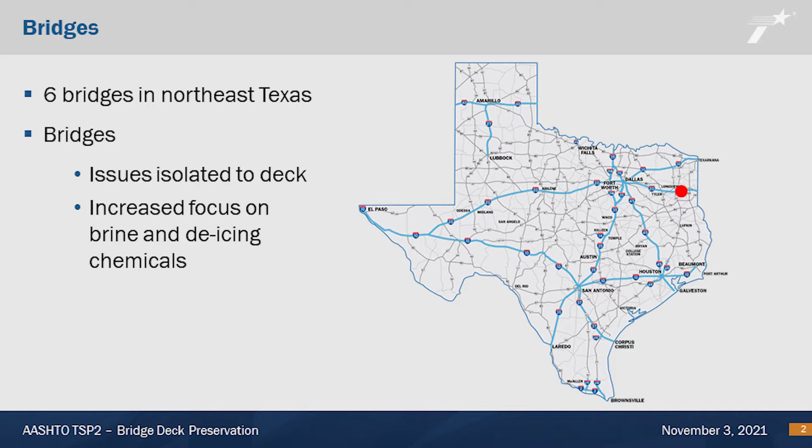I'll focus this discussion on one specific project, a project in the northeast part of Texas, where we had a series of 6 bridges with issues isolated to the deck. Substructure and superstructure were in good condition, and we were looking for a tool to add to our toolkit that would help us to provide a protection level to our bridge decks.

So with increased focus on brine and de-icing chemicals across the state, trying to find something that we could add to protect our bridge decks was important and is important as ever.

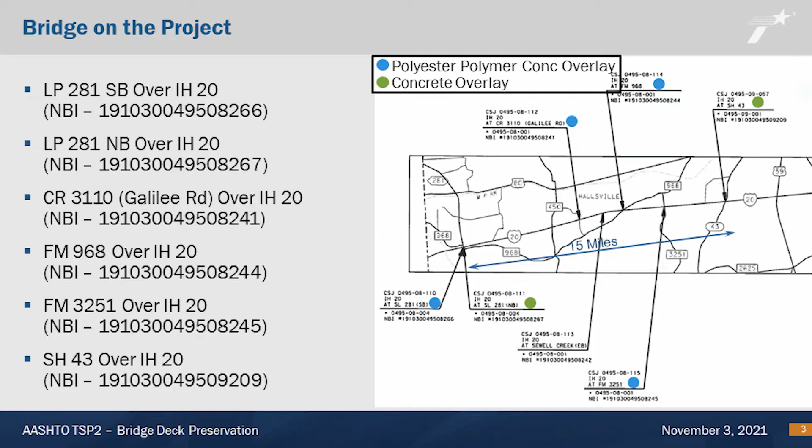These bridges that we focused our efforts on were a series of 6 bridges over a 15-mile stretch of I-20. All of these bridges cross over IH20, so we tried to take a measured approach to the risk, looking at, rather than focusing on the interstate bridges themselves, a series of bridges that went over the interstate. These were state loops, county roads, FMs, and a state highway, so we were looking as high as about 6,000 ADT, so not extremely high risk.

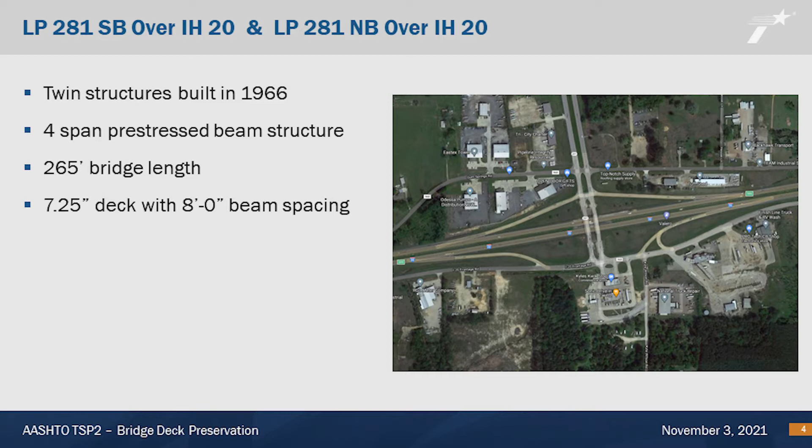All of the bridges on this project were constructed in 1965 or 1966, had 4 spans of pre-stressed beams superstructure, and had about 260-foot span lengths. This first set of bridges was a pair, Loop 281 southbound and Loop 281 northbound. Both had 7¼ inch bridge decks and 8-foot beam spacing.

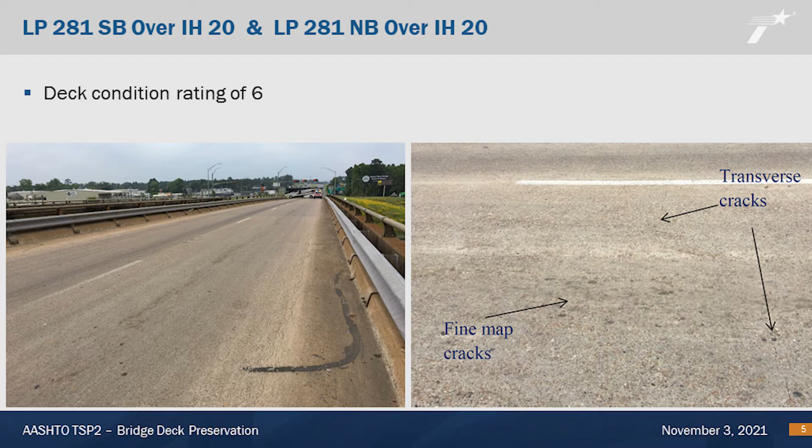The decks on these bridges had a condition rating of 6. The riding surface was worn down, the concrete was worn down. There were fine map cracks, some transverse cracks, a few spalls. The deck was polished, but again, the superstructure and the substructure were in good condition.

So on one of these, we applied the 3/4 inch polyester polymer concrete overlay, and right away, right after the installation, the condition rating of the deck was raised to a 7. On the adjacent bridge, the northbound bridge, we applied a 2-inch concrete overlay.

This has been our go-to for I'd say almost 50 years for providing protection to our bridge decks. Because of cracking, shrinkage cracking, the condition rating of the deck stayed at a 6. So even though we know we've got maybe a level of protection, it didn't show in our numbers.

So this is kind of related to a presentation or discussion that we had yesterday about quantifying the benefits of a preservation action. So in one, we had immediate benefit and quantifiable benefit if we're assigning a grade or a condition score to it based on a condition rating. So maybe we bumped up the equivalent bridge deck score if we wanted to grade it on an A to C or A to D scale.

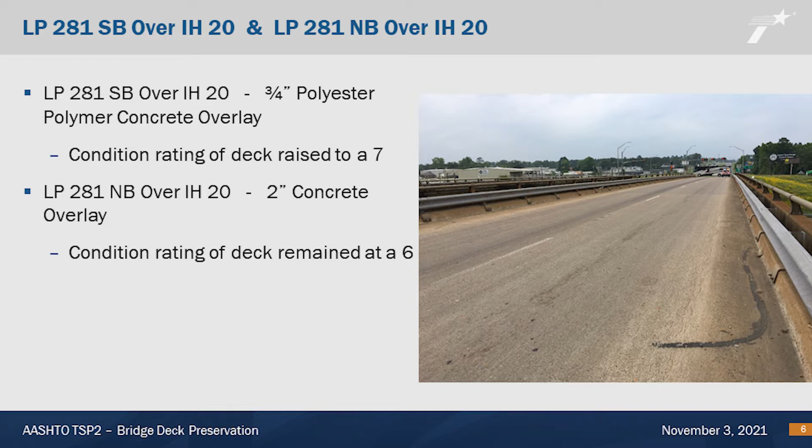Maybe we went from a C to a B, or a B to an A in this case. And so that's important, right? Making sure that we can quantify those benefits. In the case of the northbound bridge, staying at a 6 really means, well, maybe we prolong that condition rating of a 6 for a little longer, but it's hard to justify, it's hard to see from maybe administration's perspective, well, what's the benefit of doing this? So obviously, from that perspective, the PPC has a little bit of a benefit.

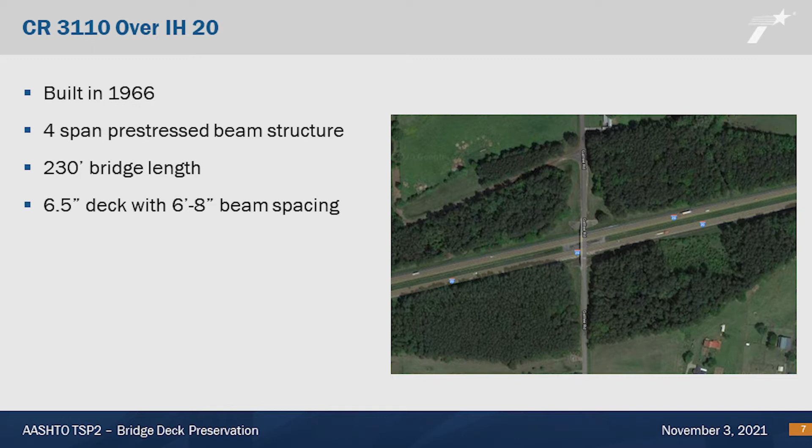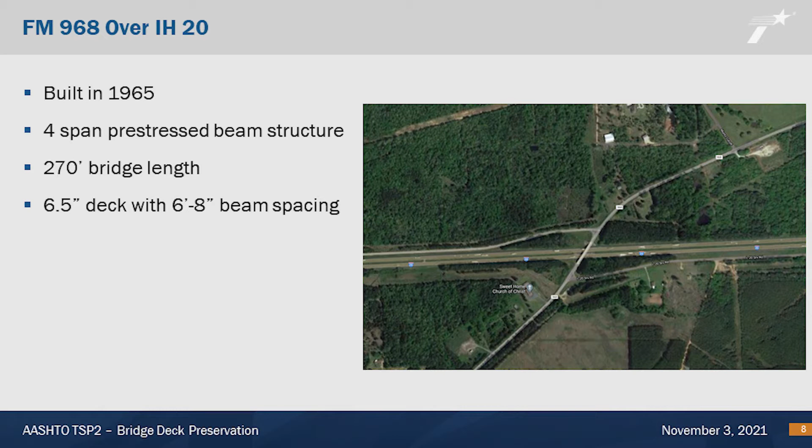The next bridge over was County Road 3110 over I-20. Similar to the last bridge in a lot of respects, this one had a 6.5-inch deck with 6-foot 8-inch beam spacing. It's got a 15-degree skew, so it has a little bit of issues at the joints that are a little bit of a challenge. The next one over, again very similar, but this one's got a 6.5-inch deck, 6-foot 8-inch beam spacing, and we're talking about a 35-degree skew there.

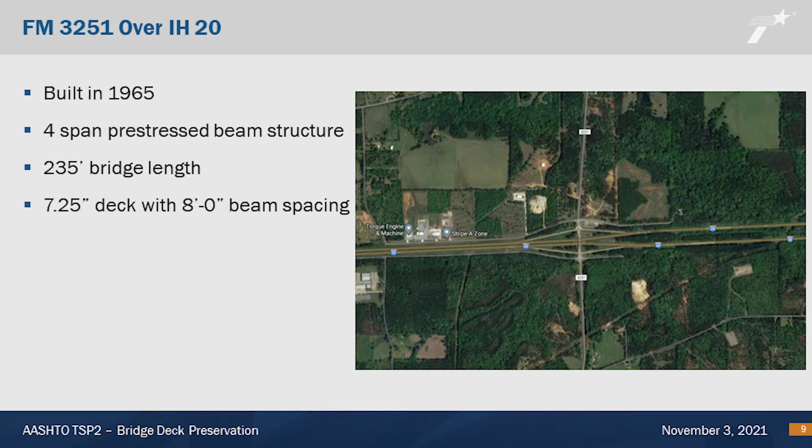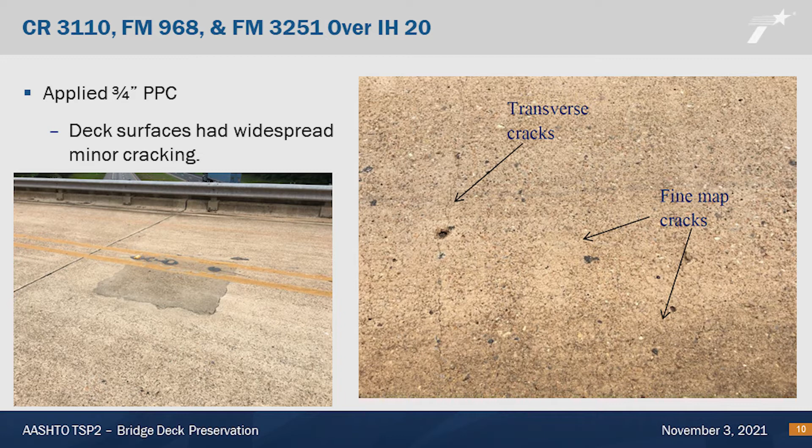Next one over, 7.25-inch bridge deck with 8-foot beam spacing, and all of these generally have two lanes of roadway. Sorry, these last three that I'm talking about all have 3 lanes of roadway and have really common deck issues where we've got transverse cracks, fine map cracks, and we applied a PPC on all of these 3. Again, the deck surface had widespread minor cracking and a couple of issues where we had partial depth or maybe even full depth deck repairs.

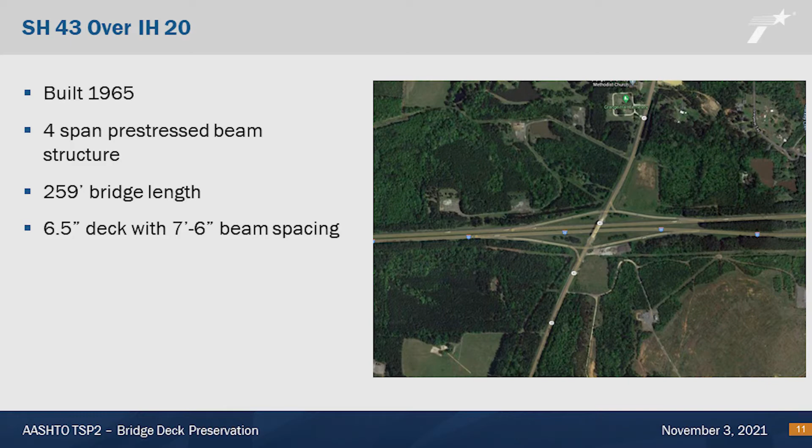At the far east end of the project, we had State Highway 43 over IH20, and on this one we applied a concrete overlay. So this was kind of more the riskier one, even though it really only had 6,000 ADT or so.

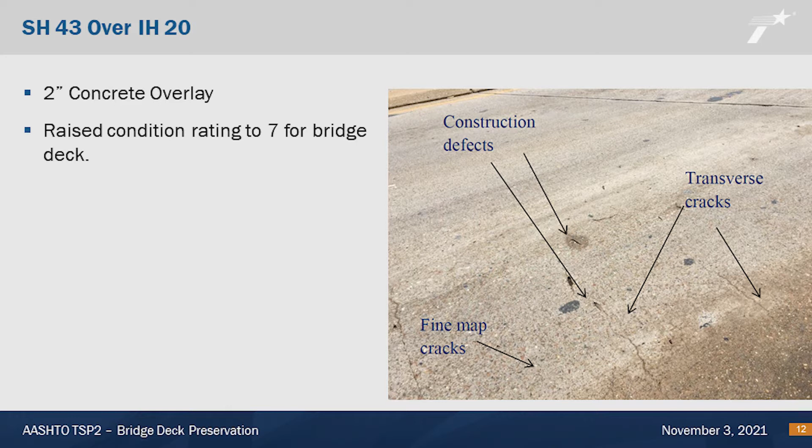Going with what we knew, what we were familiar with at TxDOT, we went with a concrete overlay, 2-inch concrete overlay. On that one, we were able to see an increase in the condition rating of the bridge. It went from a 6 to a 7. So there's benefits there, right? Those are the quantifiable benefits that I was talking about.

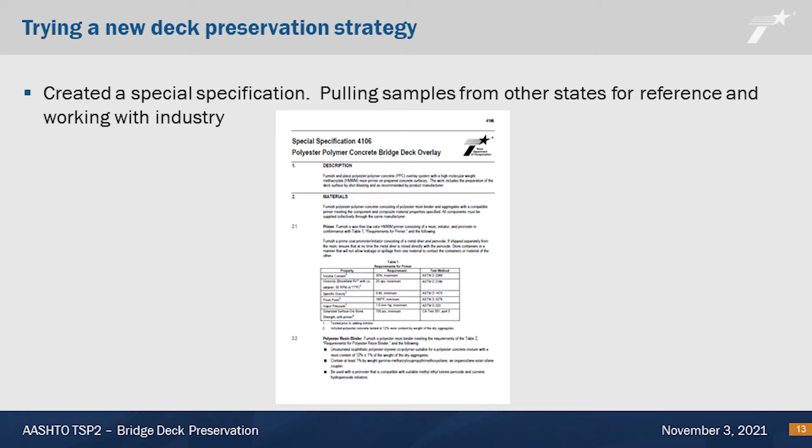So how did we get there? Well, trying a new deck preservation strategy. We've talked about how something that works in one state or one part of the country doesn't always translate to success in TxDOT or in Texas. We did outreach to industry, outreach to other states, and we saw that Caltrans has had 25, almost 30 years of success. North Carolina could do it, so why couldn't Texas do it? That was kind of the thought.

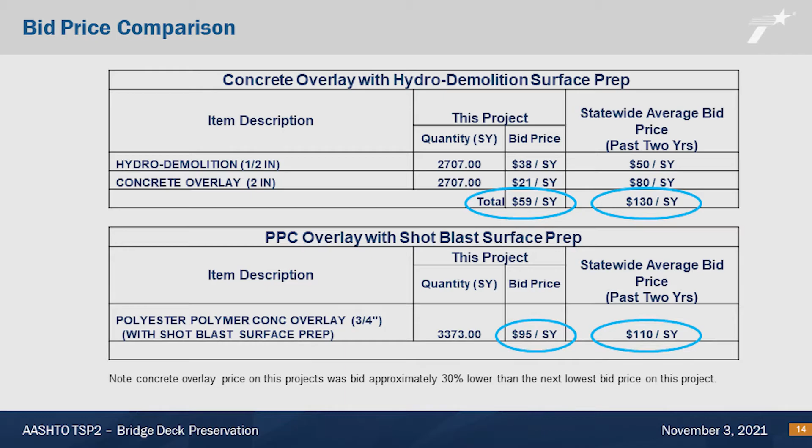You can see on this project, concrete overlay with hydro demolition came in at a whopping $59 per square yard, which is a steal for concrete and hydro demolition. This compares to $130 a square yard over the past 2 years on average, though it's gone up recently. Compared to PPC, on this project that came in at $95 a square yard, versus the statewide average for the past 2 years of $110. It's been pretty stable at about $110 for 3/4-inch PPC.

Here recently, we did try a 3-inch PPC overlay project to address grading issues on a bridge, and that one came in at almost twice that cost. I think we had the increase in quantity, but also the increase due to all of the material shortages we're seeing. So thickness plays a big part in the cost for sure. Material costs are expensive for PPC.

So just a little bit on overlay considerations. Concrete overlay, I'd say, is used to strengthen the bridge deck. Load rating of beams can be affected when we're adding substantial thickness, and really whenever we're adding even 3/4 of an inch of thickness, we should be updating our load rating, but the impacts would be more drastic once we're talking about any significant thickness in the overlay.

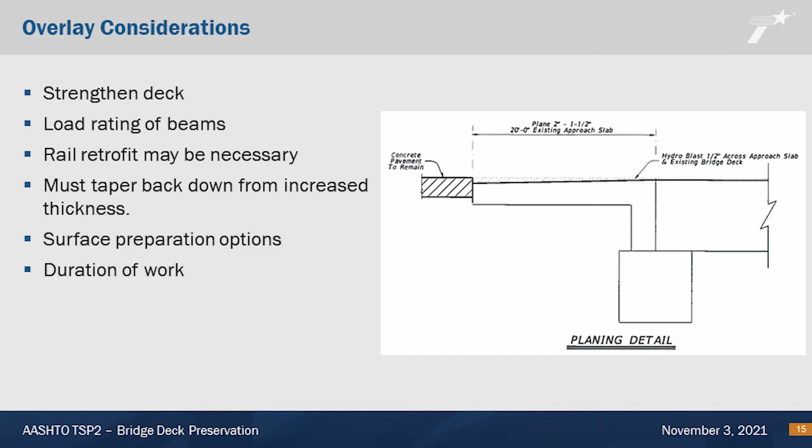Obviously, there are issues related to rail retrofit if we're adding 2 inches of height to the riding surface, since that effectively decreases the effective rail height. So rail retrofit may sometimes be necessary when we're talking about a thick overlay. And then, when we've got a thick overlay, we need to transition back down quickly to minimize the approach roadway work, so we've got to taper down from that increased thickness.

There are surface preparation options that need to be considered. I mentioned hydro demolition is our preference, but we've done concrete overlays on shot blast surfaces too. And finally, duration of work needs to be considered, and I'll go a little bit into discussion on that here in a second.

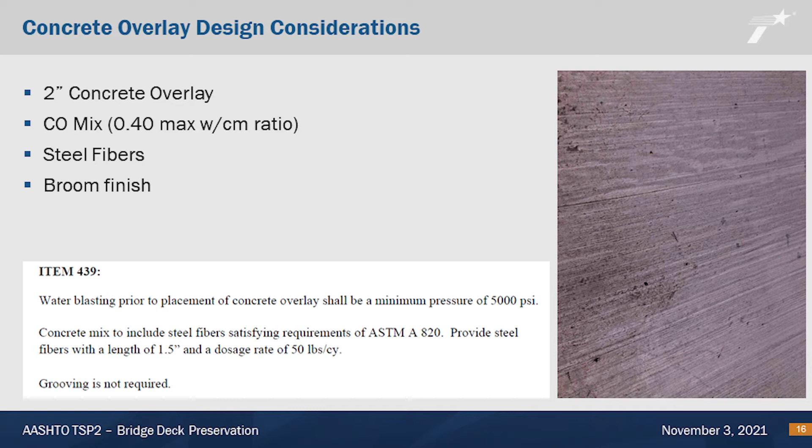Our concrete overlay is usually 2-inch; anything less and you end up with problems with it being too thin. Our CO mix, as we call it, the concrete overlay mix, has a 0.4 max water-to-cement ratio, and in the last several years we've been pushing for steel fibers. On this project, we went with 50 pounds per cubic yard of steel fibers, which seems to give us good quality while still offering workability, maybe bordering on not being able to work with it. Finally, on this project, we went with a broom finish.

As far as duration of work for the concrete overlay, surface preparation consisted of milled bridge decks, which took a day per phase. Hydrodemolition on this project took as much as 5 days. There were some issues with equipment breakdown that posed challenges, which added a little extra time, but on average it was about 5 days to do half of a bridge deck. Forming took several days, pouring was done in 1 day, and wet curing took 4 days.

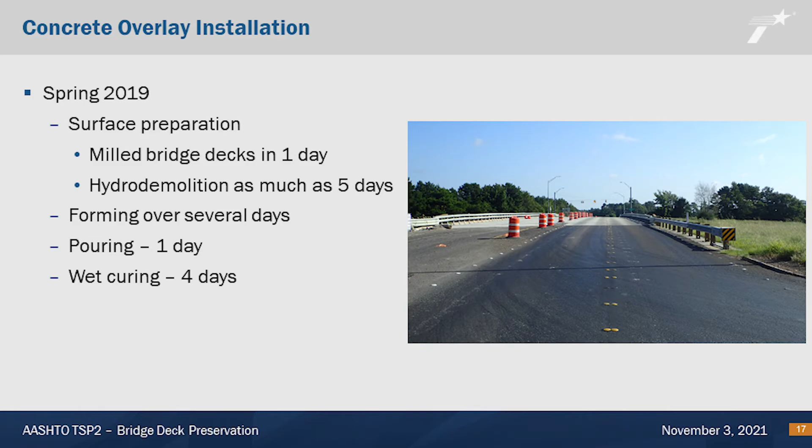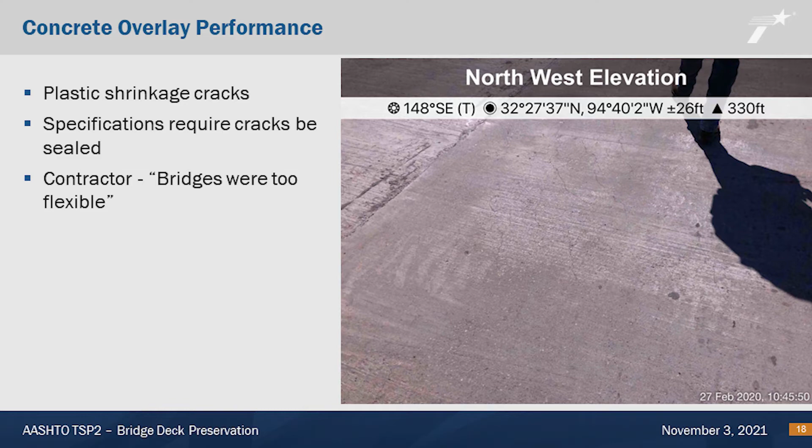I mentioned that on one of the bridges we had pretty bad plastic shrinkage cracks. Our specifications require that cracks be sealed, and in this case contractors argued that the cracking was because the bridge deck is too flexible. Well, I don't think that's really the case - they're just simple pre-stressed concrete beams that aren't very long. But that got into a long discussion, and you're going to have that, right? Contractors will point at anything sometimes to explain why something's not working. So unfortunately, that discussion took a whole lot longer than it should have, I think. In general, though, the overlay looked fine with the exception of the shrinkage cracks. One challenge at joints.

The joints in the concrete overlay were holding up, but on one of the bridges there was an abutment back wall that came up to the riding surface, and that was too narrow to maintain the joints on each side of that abutment back wall. So the contractor proposed to use polymer material for that narrow strip, which would have been a thin concrete section that didn't have the same continuity you'd get away from the joints.

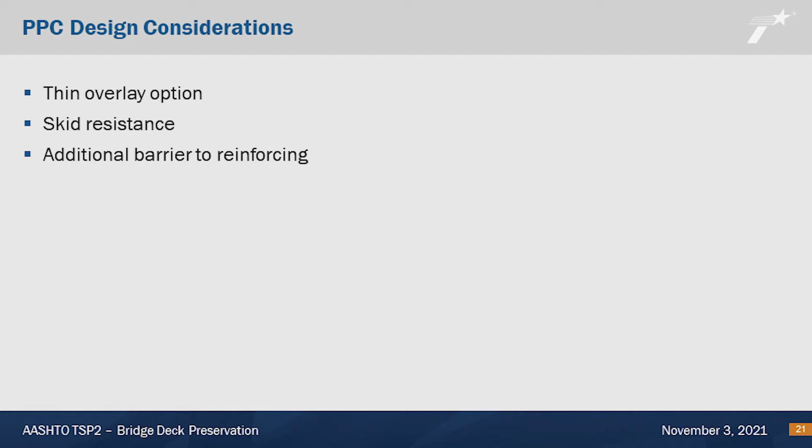Here are a few design considerations for determining if PPC is a good option on a bridge. It's a thin overlay option that offers durable protection, an increased barrier to chloride resistance, high skid resistance, and additional barrier for the reinforcing.

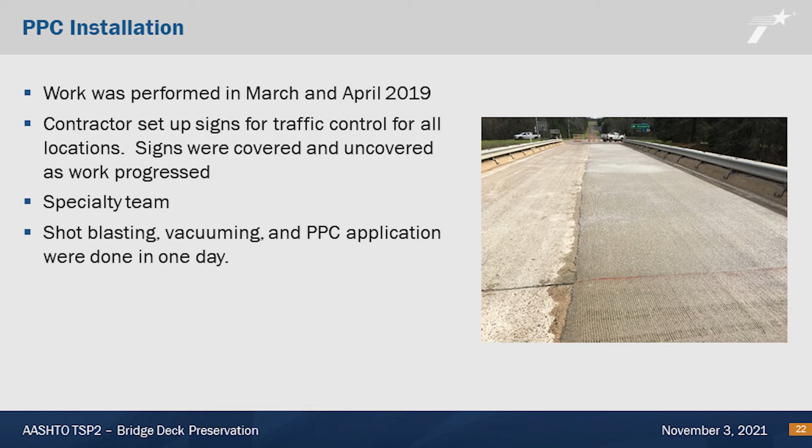PPC installation on this project, work was performed in March and April. The contractor cleverly set up all the traffic signs and covered the ones that weren't applicable, then uncovered them as work progressed. That worked really well, and the team was able to bring in a specialized crew to do the work.

The shot blasting, vacuuming, and PPC application were done in one day per side. So it was knock one out, uncover the signs, and after 4 hours you could open that segment up to traffic. I mentioned a specialty team - they knew how to activate the product, work it, and then reactivate the material.

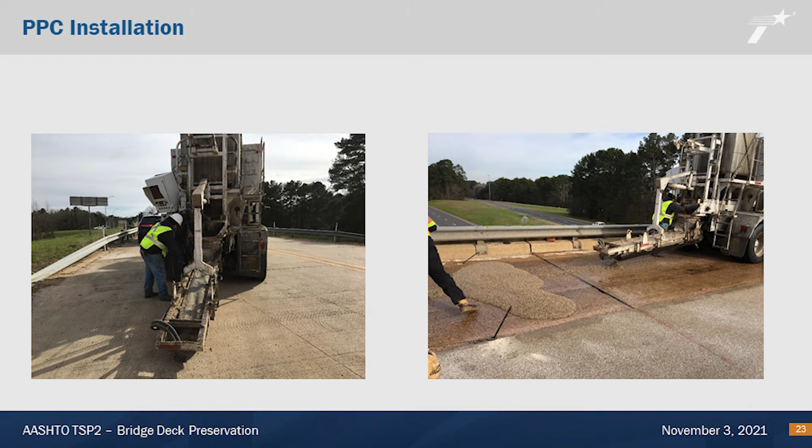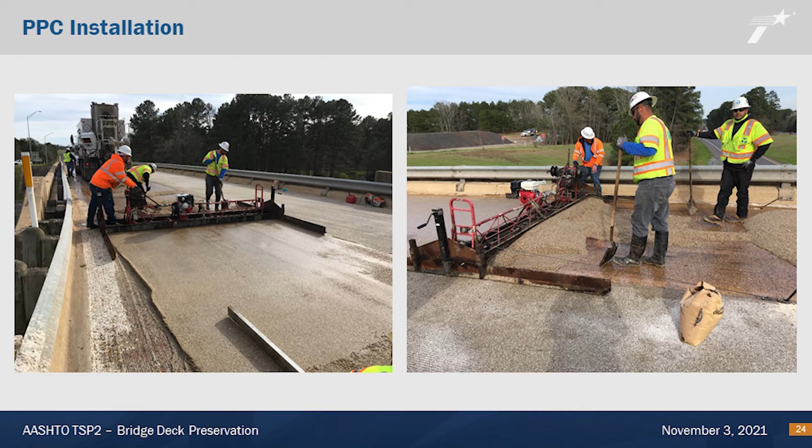Here are a few photos of the equipment and installation. The fact that it was just a 3/4 inch thick layer meant there wasn't a whole lot of setup or form work required for this. And here's broadcasting of the aggregate for that high friction, desirable surface. Overall, the performance was very good.

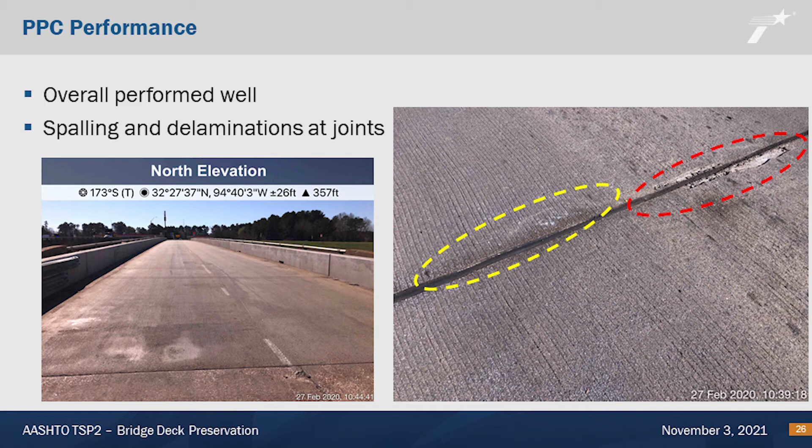There were some spalling and delaminations at the joints that, after reaching out to the vendor, were addressed by the specialty team. They went back out there, focused on those locations, and addressed the joint issues. We had a good relationship with the vendor through this partnership, which helped us say, hey, we need your help to resolve the issue.

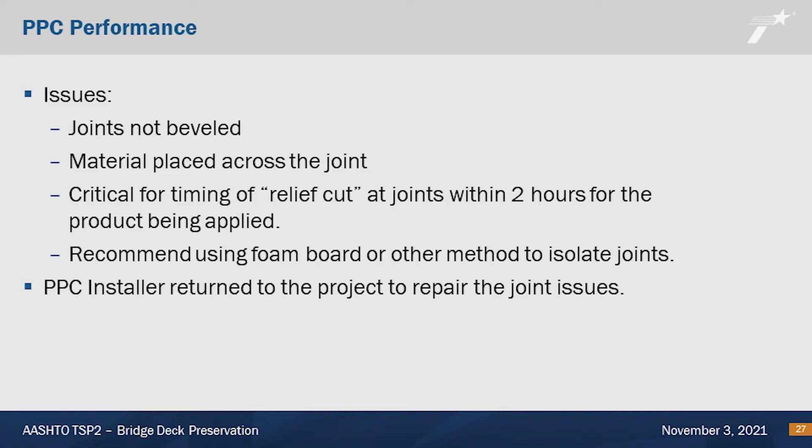So here are a few things to keep an eye out for on projects. Joints are the most important and probably the most challenging part of a PPC project. On our project, the joints weren't beveled, so they had to come back and grind them. Material was sometimes placed across the joint.

It's a critical issue to make sure the timing of the relief joints is done within 2 hours, otherwise you get expansion that starts to spall. Our preference, which we're incorporating into our standard specs, is to use a foam at the end rather than saw cut the joints, because there's the setup and that 2-hour window before the relief joints need to be cut. It can vary depending on temperature - on a really hot day you might get the product set a little sooner.

In general, TxDOT has had success with both overlay types I talked about today. There seems to be less risk in polymer overlays once we've got that specialty installation crew. PPC may offer an economical solution when deck strength is okay, but it doesn't offer the same benefits that a concrete overlay would provide for increasing capacity of a bridge deck.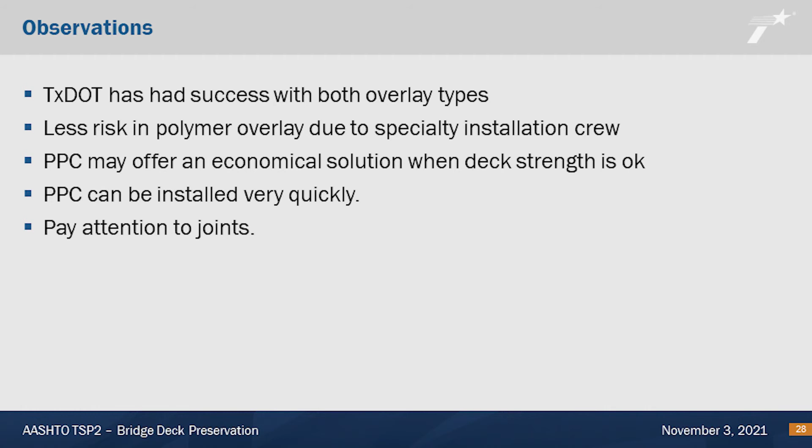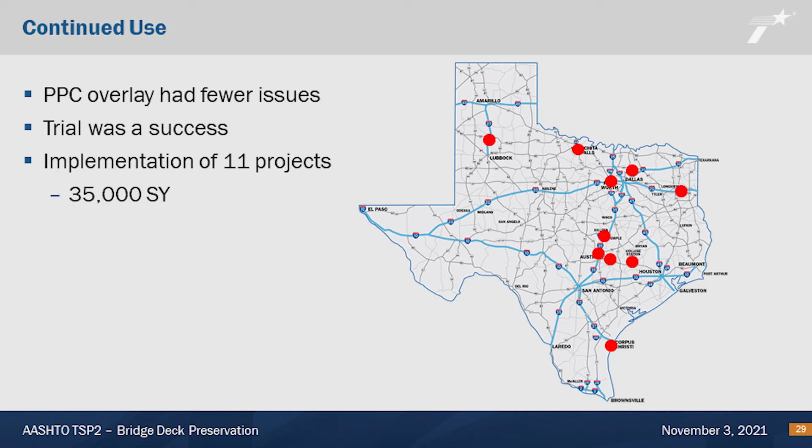PPC can be installed very quickly - we saw that on this project - and you really need to pay special attention to joints. The PPC overlay had fewer issues on this project. The trial was a success, and we've implemented PPC on 11 projects for a total of 35,000 square yards in the last 2 years.

We'll be incorporating PPC into our standard specs, and one of the challenges, which I was discussing with folks in North Carolina just yesterday, is how to handle sampling and testing. Once things go into standard specs, we need to find a way to make sure we're getting the product installed properly as we roll out to what will probably be 10 times that quantity per year ultimately. We think adding this to our toolbox through a measured approach to the trial application was good.

That's about it on what I was hoping to talk about for the project. I did want to share that I'm on the National Bridge Deck Working Group, specifically the Deck Preservation Working Group. One of our big accomplishments this past year was creating a bridge deck preservation resource guide, which is available on TSP2.

This is supposed to be an unbiased, objective approach to evaluating bridge deck preservation options. There was discussion yesterday about how long something necessarily lasts, and we've tried to pull from a number of resources to indicate how long something might last based on other sources. This is probably a good resource - if you're not familiar with it, I'd encourage you to visit the TSP2 website and take a look. It's only a few pages, and the intent was to keep it all condensed.